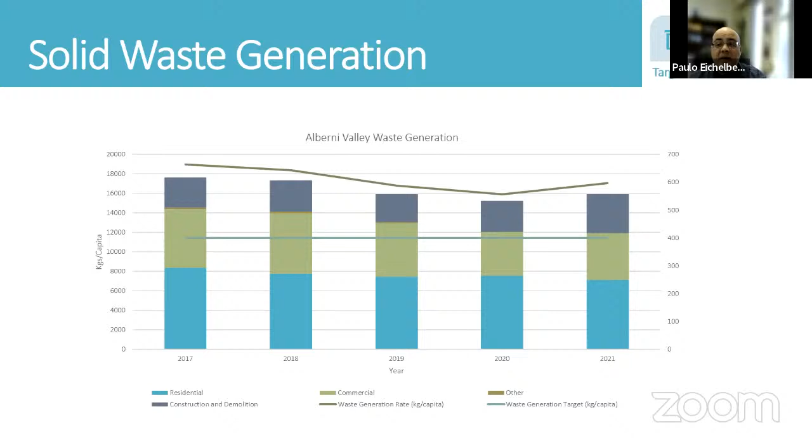The next piece, waste diversion. So this is one of the biggest things. Actually, it's the biggest thing that we had last year, and that was the rollout of 3-stream.

The tonnage, and we can also see the tonnage with the onset of the new cart system, showed that we actually upticked our recycling diversion a little bit better, whether more convenience or more material coming in, et cetera. Needless to say, overall diversion of nearly, actually a little over 60% of the waste stream from garbage landfilling into a diverted material piece there.

So garbage is down to about 41% just for the single family home piece within city of Port Alberni. And that's a huge shout out to the entire team involved on the contractors on the city side. Is a major success point.

And that's a major change that we did, 6,700 homes. And to date, so far, it looks like from 2021, this represents 1,640 tons of material, all broken out. So major, major success.

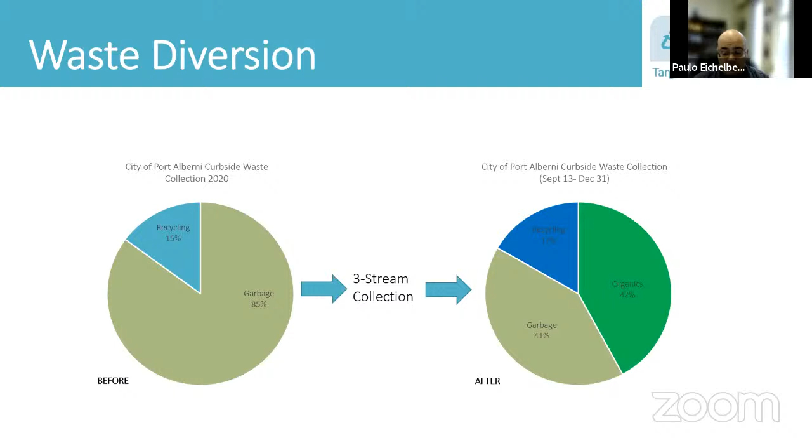The next piece on waste diversion, organics, again, is the largest contributor. So looking at the graph, you can see we're on an upward trend, especially if you look at the yard waste compost material. Yard waste compost material, the green that you see in the graph there, reached its highest amount, again, hugely in part to the organics diversion up and the upgrades that we did last year.

It also includes the yard waste compost that is already coming in and being diverted, separated at the landfill. And it also includes the private diversion. In other words, materials that go straight to the compost contractor in the valley, earth, land, and sea. When you put all that together, it's 2,200 tons of materials, all told, that was diverted. For a total diversion that you see on the graph here of upwards of 5,000 tons of materials.

And other materials that we see, it reflects everything that we've taken from 3rd Ave, from McCoy Lake, as well as Bamfield. Bamfield saw a little bit of an uptick from 40 tons to about 49 tons. As you can see here as well from the graph, still a good upward trend.

Some of the materials do remain static, but the stewardship programs are slowly increasing as well. Again, a lot of it can be attributed to more work, more cleanup work, especially due to the pandemic, people being at home, even though things are opening up again. There's also that outreach piece. People are seeing more opportunity to divert these materials.

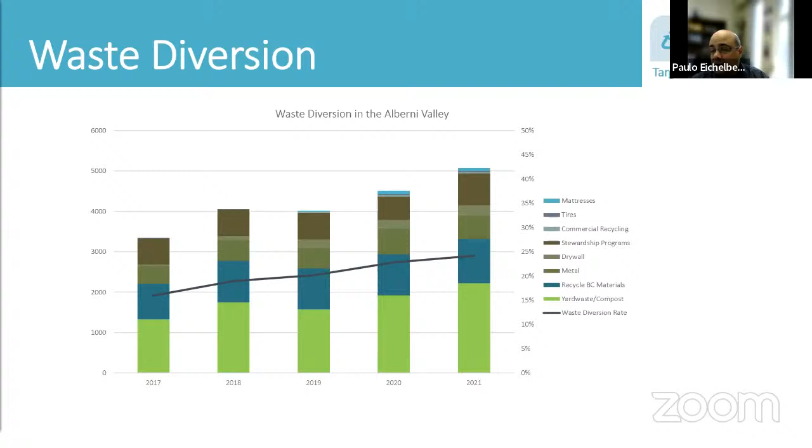So now we jump into landfill capacity. From the graph that you see here, I'm just going to shift so I can see all of this. Biggest takeaway that we see here is we've got, based on the annual report and the calculations we have, there's an estimated closure minimum of 2091 to 2093 when the landfill would in theory close.

That then does not factor in the piece regarding organics. If we get up to between 50% conservatively of all organics coming from the Alberni Valley landfill, regardless of source, there's a potential to extend that out to 2121.

Now, we'll talk about it a little bit when we get into the DOCP, but want to make a note here. The DOCP and the annual report have a very different perspective. DOCP is a forward planning document we'll talk about later. The annual report shows us our actual calculations, taking all the variables we've had in place, and looks back over the last 5 years as a measure of how we've been doing.

So these are variables that are changing on a regular basis, and we see more refinement, especially as we look at things like how our population changed, how we do with a full year of organics diversion, increases in self-haul, those kinds of things. And that'll give us a better baseline. So 2022, we'll see some changes again on how this extension to landfill capacity works.

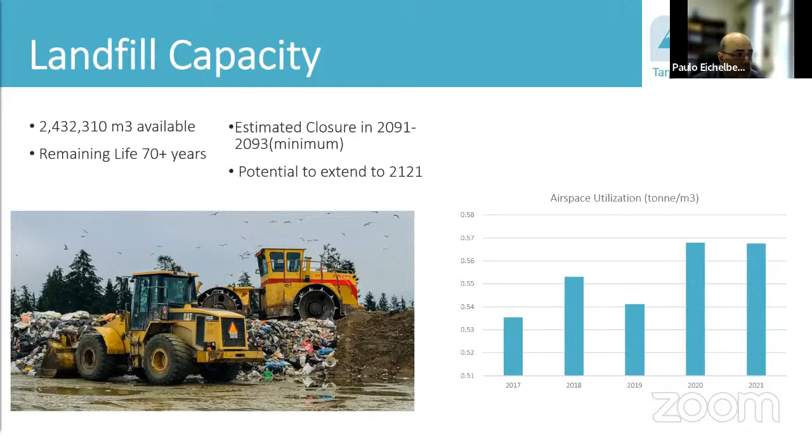Getting into finances. The graph shows the reserve funds. Total AV system costs over the previous year are up about 7%. Net system costs, which include everything, landfill, waste diversion, administration, Bamfield, Third Ave Depot, all of that, are overall up about 8.7%.

The biggest thing contributing to that, you could take a look at the reserve funds calculation as a takeaway, has been up. It's reflected in the financial plan, and that has a lot to do with the grant spending involved with the AVL upgrades completed last year to accommodate more waste segregation, as well as the curbside material we've been collecting under 3 stream.

As it stands, as of 2021, we had $2,470,524 in closure and post-closure reserve costs.

Shifting again, you can see things still look quite static for our capital fund and our post-closure fund. It's still going in a good direction, but more still needs to be done as a takeaway.

Another takeaway here, and we'll see it more in the 2022 report, is the DOCP, now that it's finalized, has updated present day costs of what needs to be put away for funding. So we're going to see a change in 2022. We've seen it in the financial plan, and we'll see it again in the 2022 annual report next year, reflecting more 2021 dollars on what needs to be put away for the eventual closure and post-closure monitoring of the landfill. That's the big takeaway from this slide.

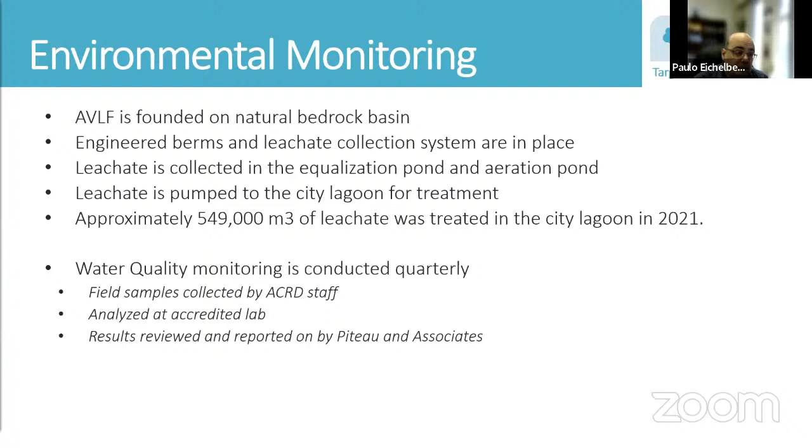Data is reviewed by an accredited lab, and Piteau and Associates have provided a 2021 report, as you've seen attached. Moving forward again, this is how everything operates. So the graphic you see here is an overview of the landfill. You may have seen this before.

And so the blue arrows indicate how everything—oh, I'm sorry, there's a question from Director Cote.

On your last slide, you pointed out that monitoring was done quarterly, and I'm wondering why it's not done monthly.

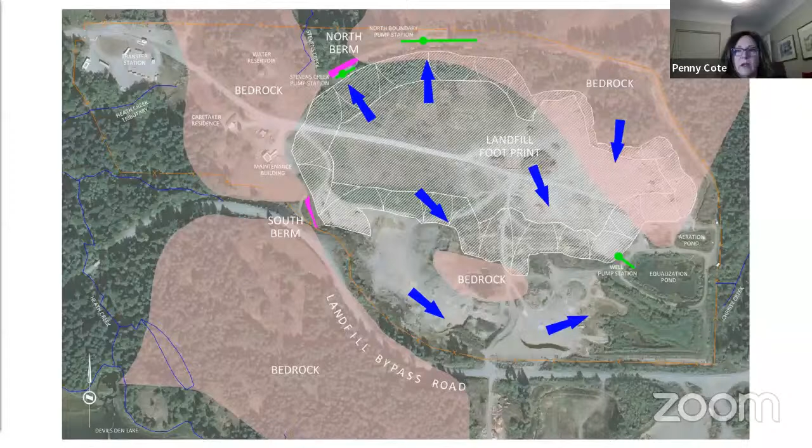That's a great question, Director Cote. Under the Ministry of Environment criteria, or rather their regulation, the requirement for any active landfill is quarterly sampling. Unless there are specific orders regarding a landfill, they can always ask for monthly, but under the regulation it is quarterly. There's also an annual summation, with some samples taken on an annual basis, all combined into the water monitoring report. That's why it's not monthly, and it's fairly standard with any of the landfills throughout the province.

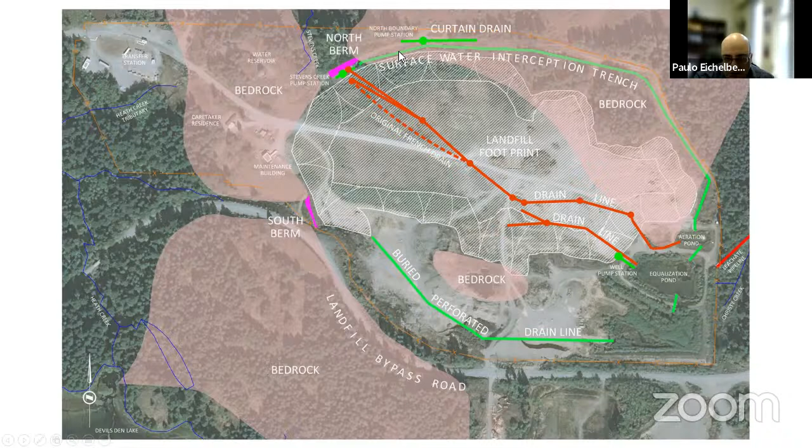This shows basically where all the water is intercepted. The next one shows you how the flow will actually work. Under the green, any of the interception trenches boosted by these lift stations direct all the water down to the aeration pond or over to the equalization pond. Same thing happens down on this end, where we have a buried perforated drain line that pitches through here. The red line indicates the original French drain that was installed in the landfill many years ago, which is also a preferential channel for leachate. Ultimately, everything winds up in this southeast corner and heads down to the city treatment lagoon through this leachate pipeline.

So we sample at various points throughout, along the border, and also from the leachate lagoon itself. We transmit any of that data forward to the City of Port Alberni and their team there as well. So that's kind of how the system works in a nutshell.

And whoop, I see another question. Thank you. So the aeration pond and the equalization pond, are they adequate for the amount of rainfall that we've had and are expecting in the future with climate change? I'm just wondering if they're big enough or if they would overflow.

Thank you, Director. At this point, yes, we have sufficient volume in place because it's all predicated on in-out. We're able to take on huge surge events like we saw last year and send this material down straight through the leachate pipeline for final treatment. The quality of the water itself is such that we're able to do that on a continuous basis. So we have an adequately sized set of ponds that allow for pre-treatment with aeration, enough volume that we can settle that. There's always an opportunity that we may need to increase it at some point due to climate change, but at this point we're sized for—I'd have to look back in the notes—but I believe it's a 100 or 200 year event. I'll have to dig through that.

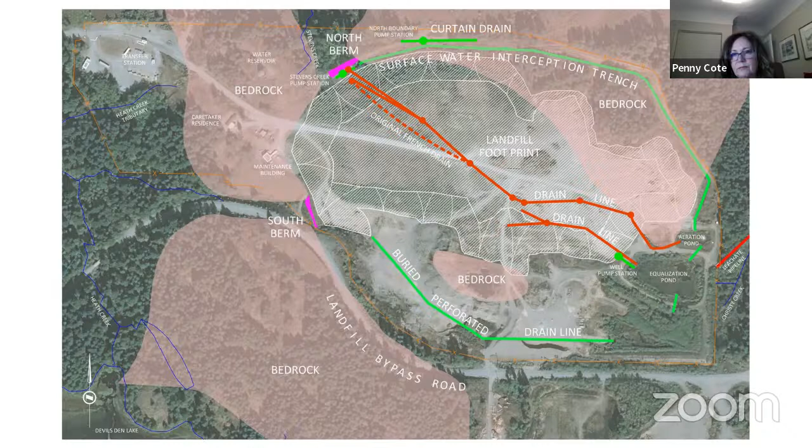Thank you. I do have concerns about the amount of rainfall that we do have and these events that we have, so I just want to make sure that we adequately have provision for collection of that amount of rainfall.

Absolutely. The other piece to tie into that is the maintenance operation piece—we'll get into the projects later on how that's all involved—but ensuring that we're able to keep things in an operating system and keep the material moving forward. With the ponds last year, we were quite low, thanks, air quotes, to the heat dome. When we got into the surge events, our freeboard, the gap between the surface of the water and the surface of the berm, never went below a meter, which is fairly standard. So we had good space to manage the water volumes. But you're right, it's definitely something to keep an eye on.

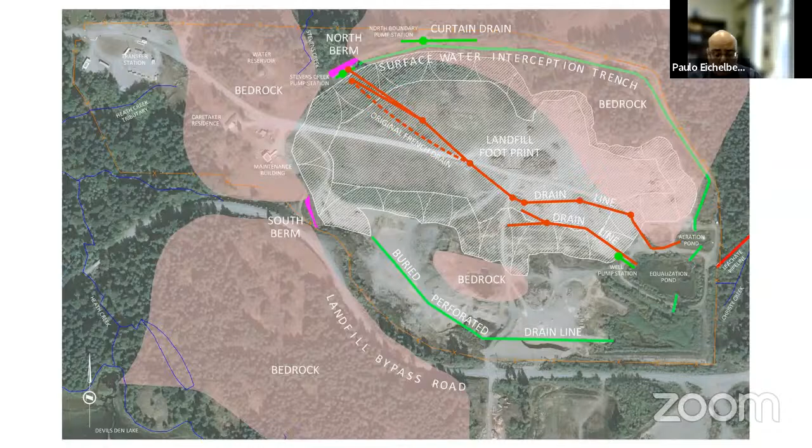All right, our next piece, getting more into environmental monitoring, and I'll touch on it a couple of times here.

We talked about issues back in 2019 with intermittent operations of the leachate interception wells. Graduating into 2020, those wells were rehabbed and pumps were replaced, addressing any issues with leachate threatening to leave the site. The idea is to keep the plume, keep the leachate material in, and funnel it through the treatment system.

The 2021 change was that we took the system that was there and upgraded the SCADA system even further, and added additional pumps so that we continue to have redundancy at all times. You run one pump while another stays down; if you need to do maintenance, you can switch them back and forth on a regular basis. I've got some graphics for that when we get into projects.

The results overall, it is a long process, but if we look from 2019, we saw a lot of the readings fall off because the wells needed to be rehabbed. Things recovered quite well once we got back up in 2020, and now in 2021 on a regular maintenance schedule with the added and replacement pumps, we see good trends maintaining everything as far as the leachate system is concerned, so we don't run into risk of excursions, showing positive trends.

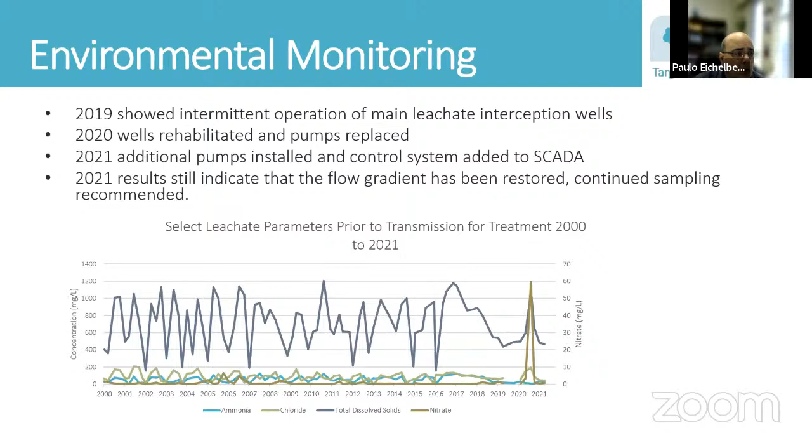Landfill gas: we worked with Sperling Hansen as part of the upgrade for the DOCP, which we'll talk about later. Part of that involved updating the landfill gas assessment to include organics diversion. That was started in 2020, but not completed until they had good estimates on tonnages they could expect.

So they factored that assessment to include organics. The big reason, and it may sound repetitive, is that when you deal with organics in the landfill you have an anaerobic environment. Because of that, bacteria gets created that generates methane. The idea is to get that material out of there. There's still material in the landfill that'll continue to generate methane and fall off over time, but the idea behind organics diversion is to pull the fresh material out and prevent it from even going into the landfill, creating an additional load of methane.

It's a huge environmental benefit not to create this methane issue. If it goes to a compost process instead, which is aerobic, no methane is generated in an aerobic process. So there's a good win-win on both sides.

Looking at how we slowly turn down the valve on organics in place, the estimate is we're at about less than 900 tons of methane generated in 2021. We actually dropped slightly from 897 to 891. We'll see if that trend continues. Ideally, the more organics we divert, the more continuous the drop, but there will still be some methane generated.

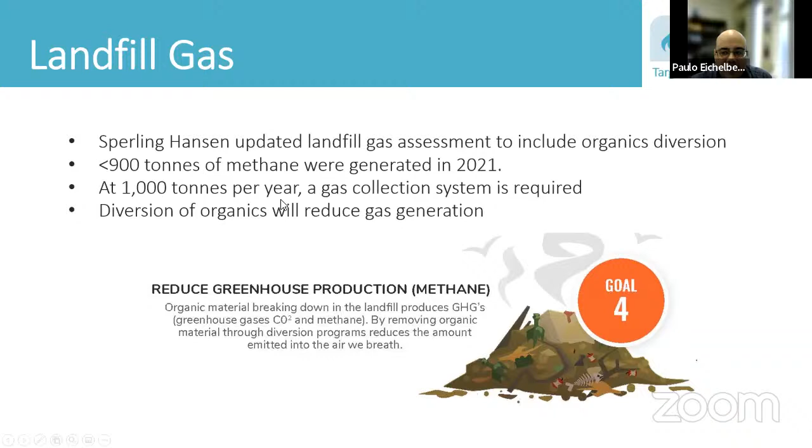Okay, let me jump ahead. I just jumped into projects, so let's do that.

Getting into the first one, we talked about it, and we just love talking about it because it's amazing. The 3-stream and organics diversion was just ridiculously successful last year. In a 16-week window, we saw 667 tons of organics. We even saw a slight increase in recycling, went up to about 232 tons from approximately 200. And it dialed down to about 659 tons of garbage that came out of there, where prior to that it would have been well over 1,000. Massive, massive diversion just from that brief snapshot in time. And it sets the stage again for what organics looks like going forward.

It was a massive team effort behind all of this, on the city side, on the staff side, contractors—not enough words. It was an incredibly successful program, and hopefully we see more of that.

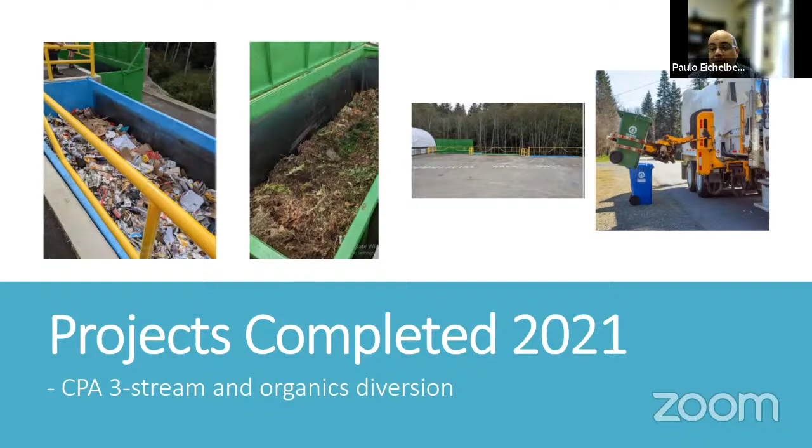Next project. I'm going through some of the key highlights here, but stop me if you have any specific questions.

We talked through monitoring program improvements. At this point we're training with the consultant and onboarding our water operations staff. They took it and ran with it, doing a fantastic job of sampling. Now they're able to continue sampling, send everything forward, and the accredited lab takes it from there with analysis going through PTO. The interaction seems to be working really well, and we'll develop procedures on a regular basis so it's just plug and play. Great job was done by the team on this work.

The other piece - I thought I'd add this pictorial in here. This is a screen you see, a satellite view of the actual SCADA, or the actual landfill site. This is what you'd see if you remote into our SCADA system - that's what the operators see.

Super brief - the blue icons you see show our pump stations. They'll show our water reservoir, that's the McCoy Lake Tower, and lift stations around the transfer station area. It'll show us levels and operating times for pumps.

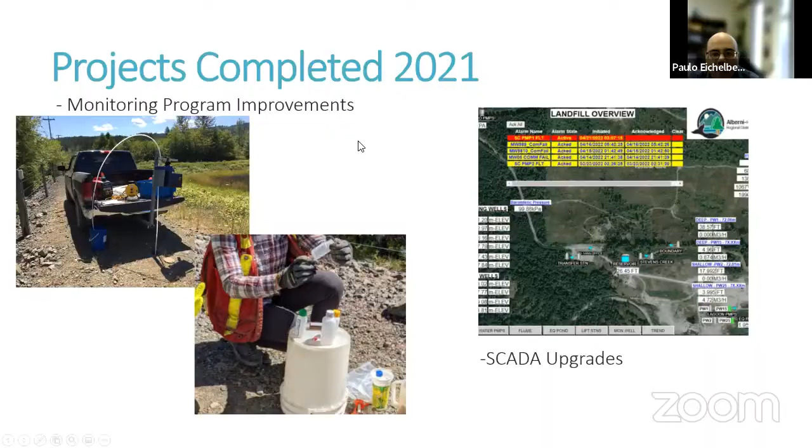Talked a little bit about the upgrades we did - it was organics, but not just organics. We did massive upgrades to the transfer station itself: new access roads, tipping bin walls, a lot of earthworks and infrastructure put in place. We've got the area where we offload curbside trucks, tipping walls laid in place for any depot material, slowly moving that down, and opened up parking areas for working day or night, adding directional signage, you name it.

It seemed to work out really well - a lot of people gave a lot of thumbs up as they worked through the system. It was definitely a big change because it looks like a brand spanking new transfer station. So that's where we landed on that.

Other projects completed: asset management plan is an ongoing piece. In 2021 the consultant completed their site inventory - not just here but the West Coast as well - and went through all our sites establishing life cycle pieces to work forward with on all site infrastructure: Alberni Valley Landfill, Bamfield Transfer Station, our Third Ave Depot, things like that.

We also rolled out, or expanded on, the Sort and Go app, the waste app. Some brief takeaways: we garnered 4,300 users in 2021. Three Stream had a lot to do with that, with a lot of the alerts that went out. Out of the 4,300 users, roughly 3,500 came on board at the beginning of September, downloading and utilizing the app however they did it, to get all their schedules, how do I dispose of this, all of those sorts of things.

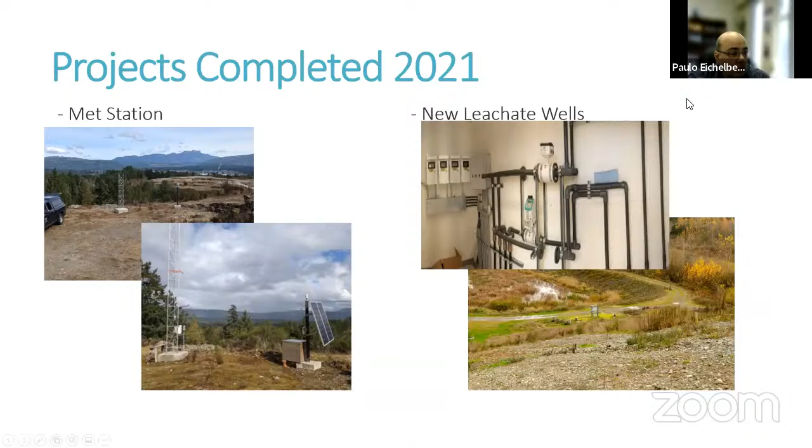Landfill gas flare installation, we talked about that briefly. That is going in this summer. We hope to wrap that up, hopefully by mid-July or so.

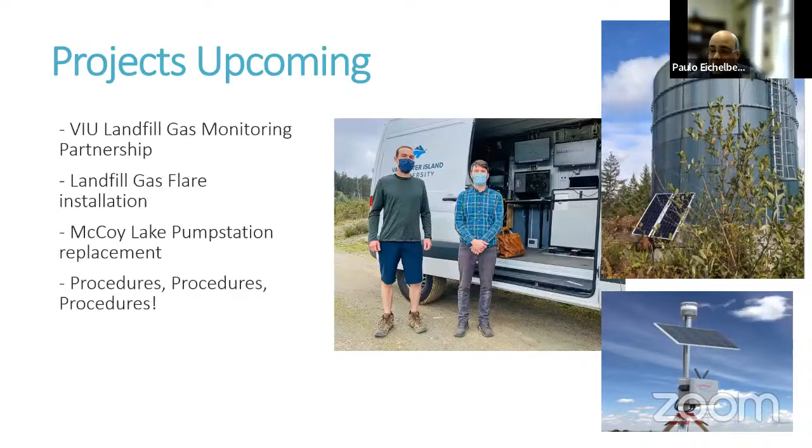And then finally, it's procedures. We've done a lot of these, whether big or small upgrades at the landfill. So a lot of it is procedures. Now we've got all these pieces in place, we're going to be refining those procedures with the group from VIU, with our water staff, with all of our contractors, so that there's a go-forward every single time - anybody coming in can always pick it up and run any portion of our system.

Other projects: we have the Alberni Valley Recycling Collections contract. That's the RFP award for Beaver Creek, Hupacasath, and Tseshaht First Nations for curbside recycling, and that'll be coming out shortly for contract award. We'll bring that back for board consideration.

Solid waste bylaw is a longer range piece of work. We'll be doing some of this over a couple of years, but ultimately we're trying to see a more complete picture of what waste is like. We know what comes through our doors, we know how the stewardship agencies work. What we don't see is what a lot of companies are diverting on their own - if they're doing various works, the easiest example is recycling metals, that immediately goes into a metal recycling stream that we don't necessarily see, but the work is being done in the Alberni Valley. So it's putting mechanisms in place so we can get the data to get a more complete picture of exactly how much material is diverted from the Alberni Valley landfill, whether inside our system or outside of it.

We're looking at investigating baling of recyclables - that's consolidation of any recyclables that come through the Alberni Valley system. It's an investigation piece in place right now, looking at cost, looking if it makes sense to realize some efficiencies, and seeing if we're able to consolidate recyclables before they leave to a larger material recovery facility for post-processing.

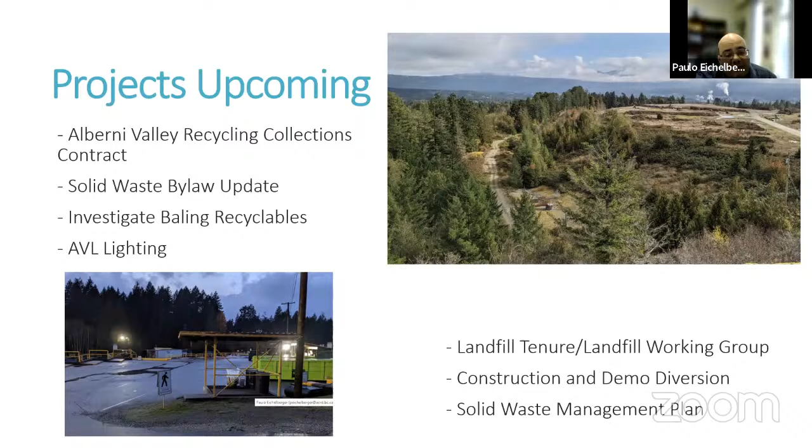At the end of all this, just a quick shout out to everybody involved - it took a village. Both staff, contractors, and the public for being patient with us through all the changes that we did. We've seen the before and after picture of the landfill.

That's about it, so I'll open it up for any more questions and I will stop sharing.

Go ahead, Director Corbeil.

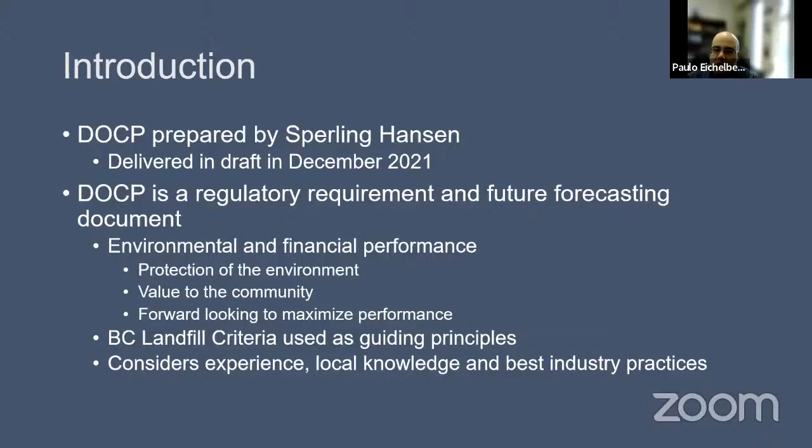Brief overview, we know where we are. The site is north and west of Port Alberni. It is a strategic asset just based on location. The next closest sites are West Coast Landfill, Comox's, and Nanaimo's landfill. So this is kind of a key hub for anybody passing through this area, within this area, for where you deal with solid waste.

Briefly, we're still working through landfill ownership tenure. We've got fairly good road access, and it's an old site, going back to the 70s. It's got power and water, and a good internal network to get around the site, whether you're diverting waste, doing monitoring work, doing maintenance, you name it.

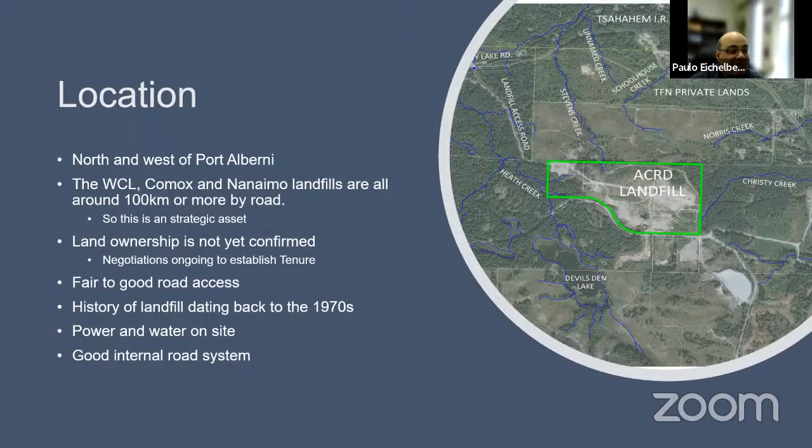The structure is, again, a super technical document. It's fairly heavily involved, and again, it's a highlight. So the structure is based on how the province would like to lay out everything in place. And the theory is, this takes you right from the history of the landfill itself, right through to how it's being designed, how you sculpt the hill.

Geotech, lifespan, what it's forecasting, what it's going to be looking like in theory in 5, 10, 20, 100, 200 years, how you fill, how you manage materials, how you operate, environmental systems, fire safety, cost analysis, and ideally it's a planning document. Because it forecasts in a very long direction, ideally it's updated every 5 years. The reason for that is to update those current day costs to understand exactly where we're at and what we may need to store away for reserves.

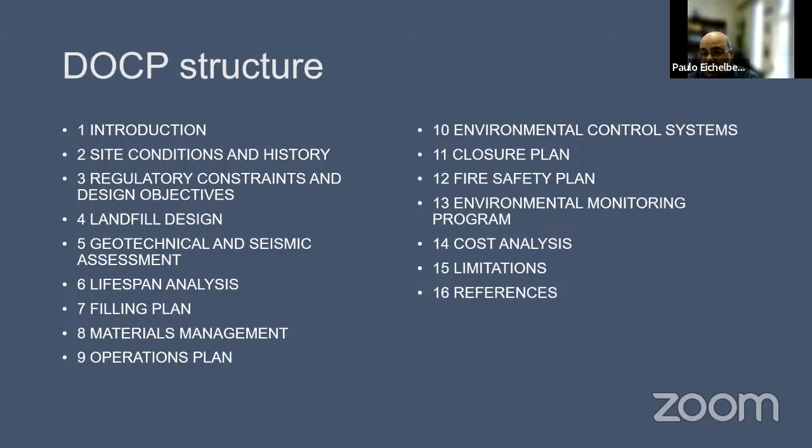Really big piece to this document. So I'm going to touch on, as we go through, some of the sections, some of the key sections, and some of the takeaways. I'll try not to blow through it too much. It's, again, a lot. As we talked about earlier, regulatory constraints and design objectives are in place here.

I put in some of the key highlights that we look at, but Sperling Hansen did a preliminary conformance comparison. Here's what the criteria looks like, and here's what the landfill looks like. Looking at setbacks, where they're at. Are they in place at 50 meters from the boundary to the land parcel?

What's the contaminating lifespan? Contaminating lifespan, you'll hear me refer to a fair bit. The idea is, when a landfill closes, how long, in theory, is material breaking down until it's no longer of a concern. So your contaminating lifespan of a landfill is fitted in under the criteria in different sizes.

It literally goes through a 30-year closure and a 100-year post-closure, or it gets up to a 200-year post-closure. Right now, by default, that's where our landfill sits. So you're looking at the year 2400, 2500 kind of thing, when in theory you would never have to monitor the landfill again if nothing changed, no tech changes. We know that's not real, but that's how the planning looks as far as the regulatory piece is concerned.

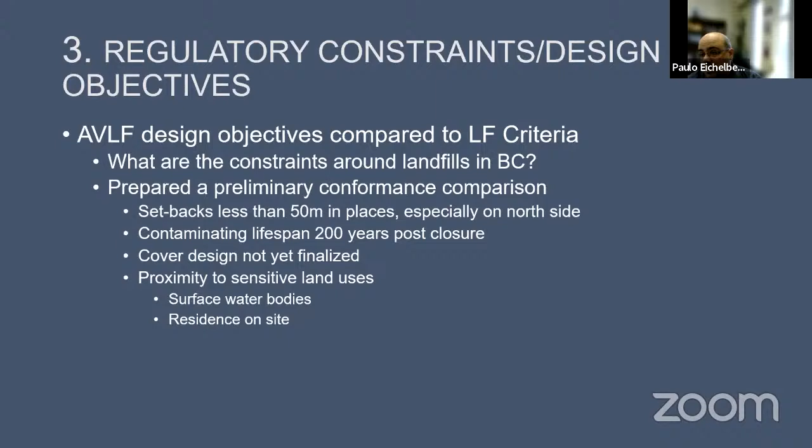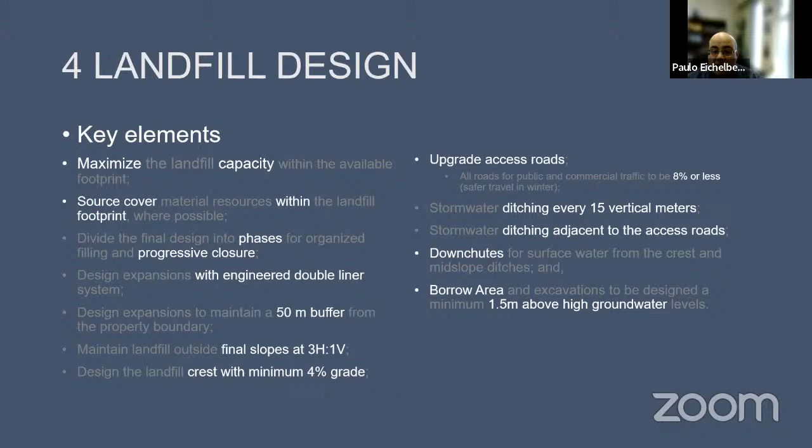So landfill design, these are some of the key takeaways here, but I'll actually shift to the next slide just for some highlights. You're looking at maximizing capacity, where your cover is coming from, how you phase in your closure of the landfill, the types of systems that you use on a go-forward basis, how you maintain your buffer - in other words, where your toe of waste is as you build a hill upwards, how your slopes look, what the total crest is going to be like, the top of the hill that you're sculpting to ensure that you have proper drainage.

How you're accessing the material. As you make the hill bigger, you need to be able to access various points on that, whether you're landfilling or you're monitoring after the fact and checking cover systems, how you build downchutes, how you deal with surface water, and where your borrow areas are going to be for cover material and for construction of your landfill cells. And now we'll go through a satellite map here.

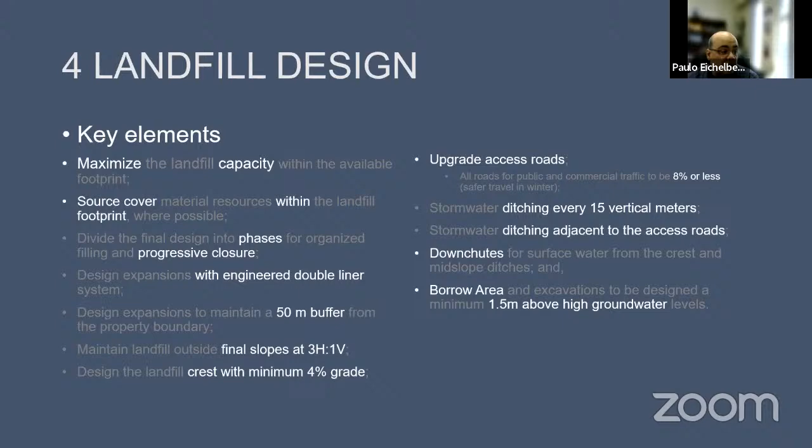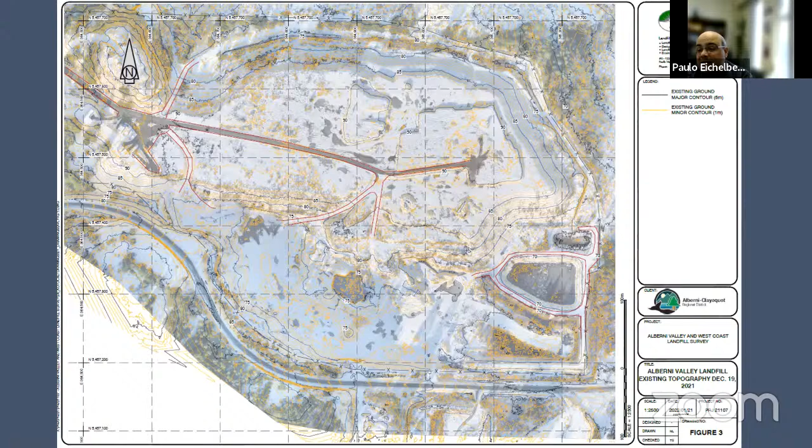Now that's what it looks like now. This is what it's going to look like in the future at full build out. Again we've taken the hill and put it on its front. It shows the buffer zones to the end of the parcel, the contours every 5 meters showing how big the hill will get, and the conceptual design of where the access roads are going to be.

You break it up about every 15 to 20 meters so you're able to access certain areas of the landfill—whether you're closing off the landfill or getting larger commercial traffic through to drop off waste safely, move off site, and then let the operators come in to build the actual finished hill.

Now we're going to get into a section with the graphics that talks about phasing. The original landfill approach years ago was you had a large area and eventually covered everything up. Because that's not really realistic given the size of various landfills, it makes more sense—and it's been captured in the landfill criteria for the last 6 years—to go for a phased approach. You build up and do sections of the hill, trying to build lobes in these different sections.

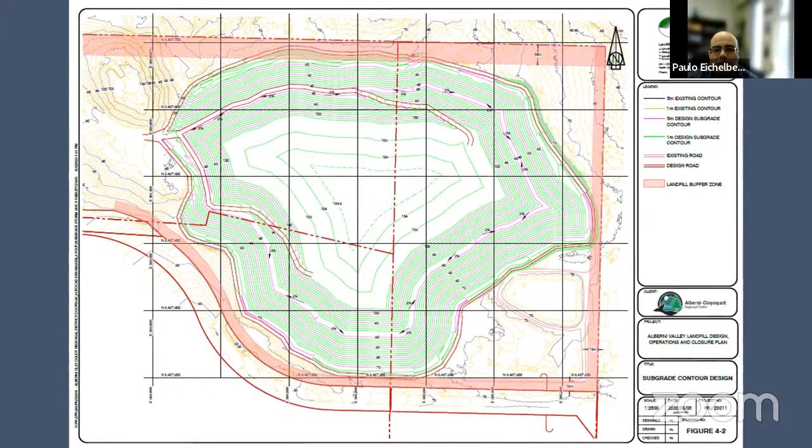Phase 1 was designed in the DOCP working with Sperling under 2 scenarios as we build the hill. Scenario 1: nothing changes—we have organics in play, factoring in a population increase of 0.9% year over year as a forecasted estimate, different from the annual report which was a snapshot looking backward. This is go forward.

Scenario 1 is status quo. Scenario 2 is fuller organics diversion. We try to keep it conservative, assuming 50% of organics are diverted no matter what they are or where they come from—commercial, residential, kitchen scraps, yard and garden waste, wood waste, all those sorts of things. It also factors in what happens when you fill your waste cell and compact it, or compact it further to create more space. These are the two scenarios we'll talk through going forward.

So again, our aerial view—this is what the first phase, that northeast section, looks like. I'll breeze through some of this, but you can see our contours: the difference between current level, the brownish area, and where the phase tops out, we've got another probably 15 meters of lift to go. If nothing were to change, it's approximately 26 years, but it will actually be more based on increased compaction, increased diversion, and a ban on organics.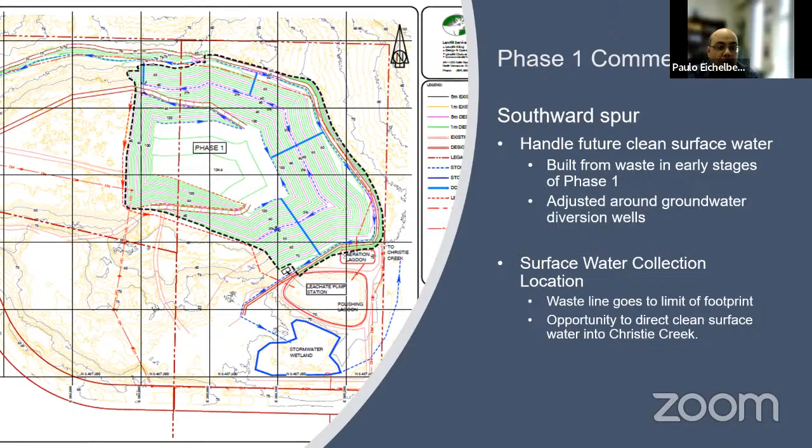So we built around that, and that's what the design takes into account. Now we'll go forward - this is just a quick image of the southern area, looking down towards where, in theory, the stormwater area would be.

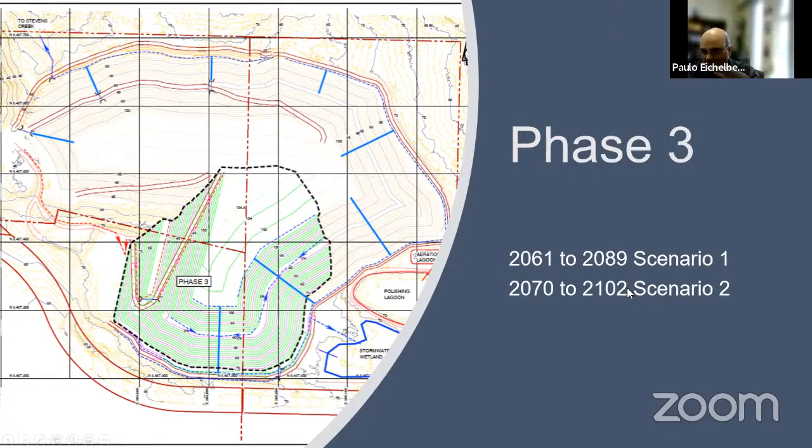This is what phase 2 looks like under scenario 1 or scenario 2, either to 2061 or to 2070, before we do a full closure. By this time, phase 1 is completed. Phase 3 takes us out to 2089 or 2102, again with better compaction and more waste diversion. And then the last one gets us out to 2114, which would be the full build-out of the landfill.

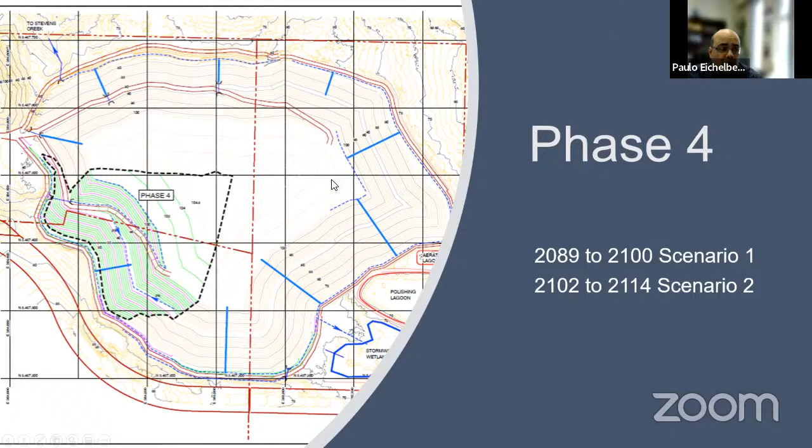By this time, the full closure system and downchutes are all in place, and you go to the point where you're dealing with just your leachate system, your stormwater wetland, and monitoring and contouring maintenance on the actual cover system as well. We'll get a little bit more into detail on the lifespan analysis.

Some of the key takeaways here - again, this is the scenarios that I talked about. I'm just going to shift the screen a little bit here.

These are the basic rates that were calculated for modeling. The disposal rate was 0.564 - this was at the time for the 2020 year. We stuck with that to keep it like for like, but asked Sperling Hansen to ensure they factored in organics diversion. We agreed upon setting it at 50% to be conservative. The idea is we're aiming for higher than that, and higher than that means you would extend out the landfill. But being conservative, these are the two scenarios.

You're using either your current waste-to-cover ratio - in other words, how much waste is being put into place versus how much dirt cover is being put over that waste. You have to get down to a certain minimum under the criteria, usually about 20 centimeters or so, compacted in place, and then the rest of it is compacted waste.

So this, in theory, is where we are. Industry best standard is usually around 4:1, in other words very compacted waste. Right now, a model density is about 0.81, or 810 kilograms per cubic meter. Ideally we want to get it up to 0.9 for the material that is physically going in.

They also factor in settlement, because as we know, over time, as you're sculpting the hill, it is going to slowly settle out - that's just the nature of the beast when waste breaks down inside the landfill. You wind up getting back some airspace from that, but that's something we kind of keep as just a control factor in place, and it's what Sperling Hansen utilized for this model.

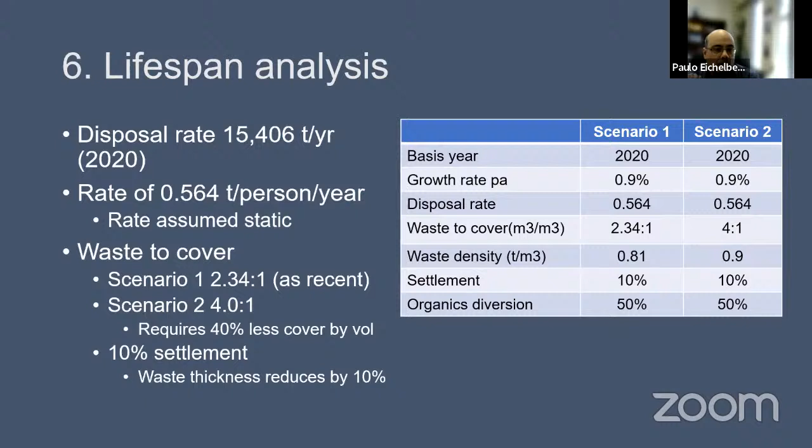This is just a summary of the years under scenario 1, scenario 2, either 80 or 94 years. Again, conservatively, we saw in the initial calculations in the annual report that, in theory, we could get up to 2121. Absolutely realistic with the way organics is going, but we need more baseline data to see where we land.

Again, this is a planning document, and the whole idea is you don't count your chickens before they hatch. So use that as a guideline and see how good it actually is going, with the annual monitoring of the landfill itself.

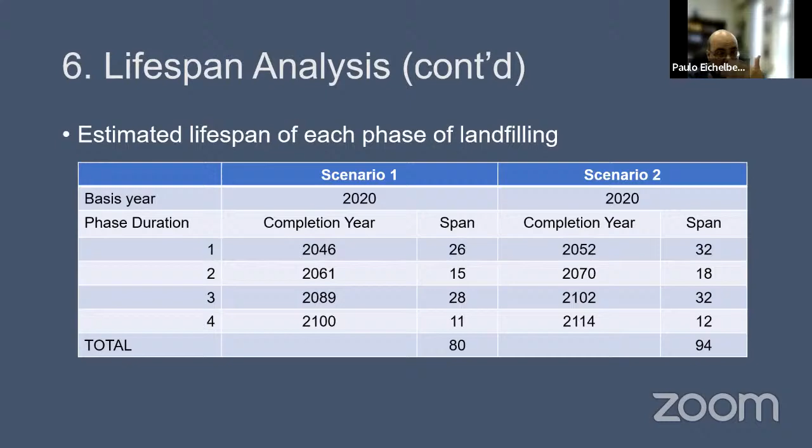So we talked about phased filling. This is literally phased filling of the actual phase 1, that initial lobe I talked about. We saw an opportunity on the side there, near the aeration pond, the equalization pond, and the pump station.

There's opportunity here to build up this slope and build this plateau out on the existing toe of waste. We're starting that this year. The period over the next 20 to 30 years where we build out phase 1 involves building your foundation like you would build a house. Get up to plateau, then talk about putting on your roof. Moving forward, we'd be looking at closure on this outward cap, then work our way up the hill, as you can see the flow.

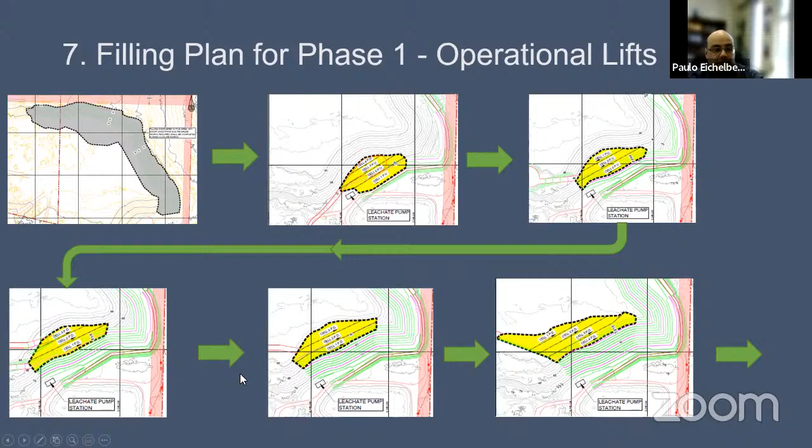This is all done in 3-meter high lifts, and then you get up to the final plateau. This portion of the hill is complete, and we're doing what's called strip filling, back and forth across the landfill, to make that big plateau as you build a hill outward. For comparison, we're at about the 90-meter mark. The final elevation on the hill is eventually going to be 105 meters.

It takes a long time. We're talking hundreds of cells to get to that point, which is why we're seeing this visually, but at the same time, it's 30 years or so to actually get to that elevation before we go to the left and start building out phase 2.

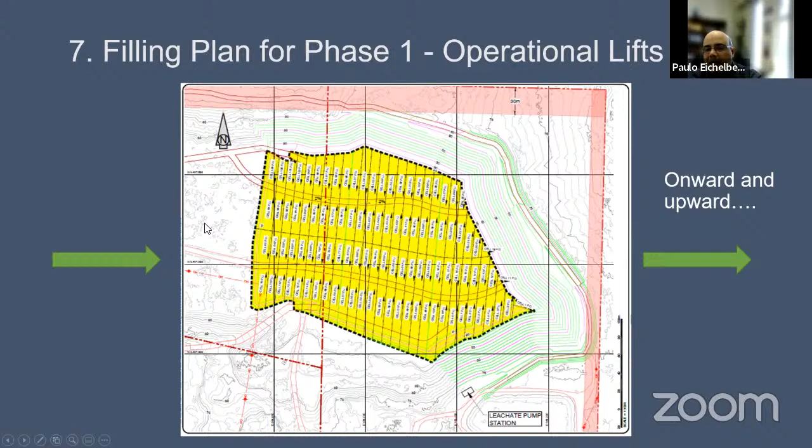Now we'll get into materials management. This is all the materials that go into building this site. The document covers what you're using for cover soils, how you're applying it, what you're using for drainage, road crush material, topsoil. Eventually you'll have a final cover system used for topsoil, and protection layers in place, like riprap, which is larger material.

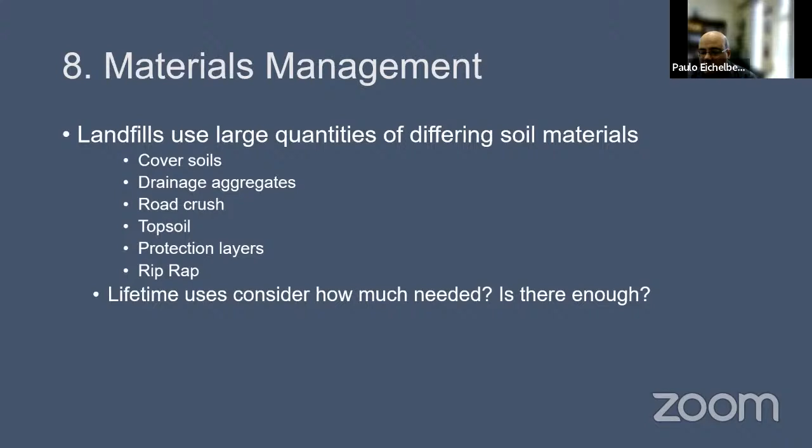So lifespan planning considers: do you have enough material? Do you have enough cover material on site, or do you have to get it off site? In the next chart, under the scenarios, I'll highlight where we need intermediate daily cover, borrow areas, and material haul to site.

We know we've got roughly 60,000 cubic meters of cover material. By the end of life, we will have needed 500,000 cubes at minimum with full build out. So that's looking at whether you're blasting out material on site—there's very limited material you can use—or whether we look at off-site use.

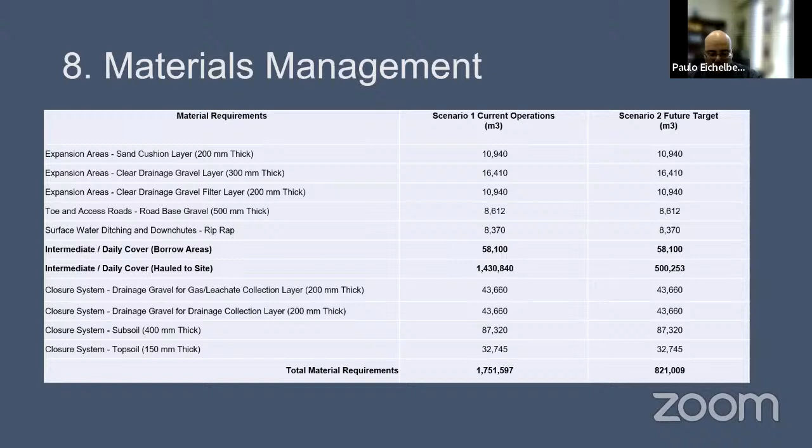We currently truck in material from soil piles at the Avra Airport, one of our assets, and utilize that material for cover operations and general operations of the landfill, in order to meter that material out. That said, there's continued work on best practices in this document on how to more compress your cell and get even more efficient than they are now with how you use cover, and some of the considerations we have in the manual.

Construction demolition waste—just a brief note on it. This is great material: mixed aggregate, crushed woody, drywall material that's not separated, those harder structural materials. They're great for building retaining berms, and then you can put impermeable material around them. We look at options for stockpiling that material for use, and opportunity for using contaminated soils—they could only be up to a certain level, so likely not, but there is opportunity to use material up to a certain level in internal operations as you build your landfill cells.

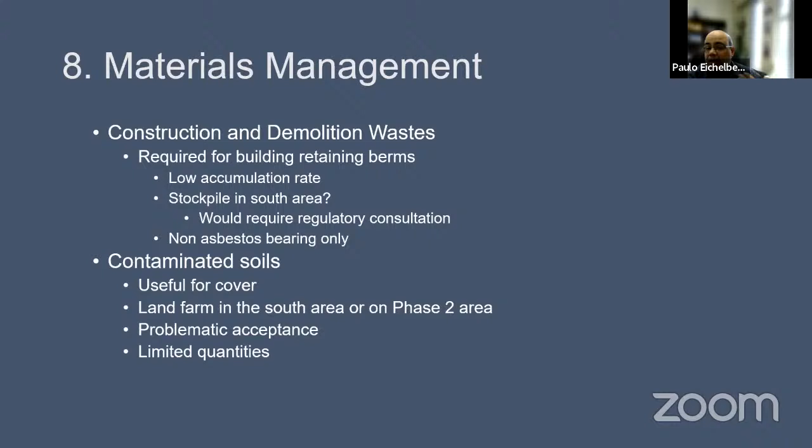Operations plan: the operations plan is literally how you're building the cell, as you can see the team here, how you spread and compact things. This is generally the takeaway of how they not only build the cell, but how they'll be sloping everything so they can move back and forth after waste has been dropped off onto the cell, and using operating costs, linking reserve funds accumulation to the volume placed.

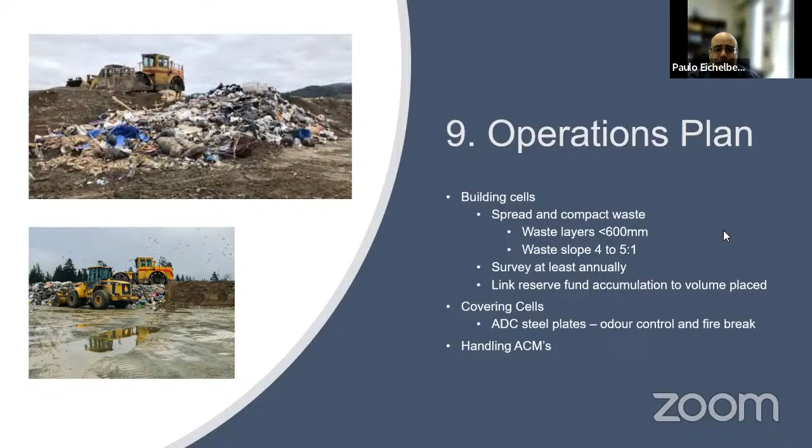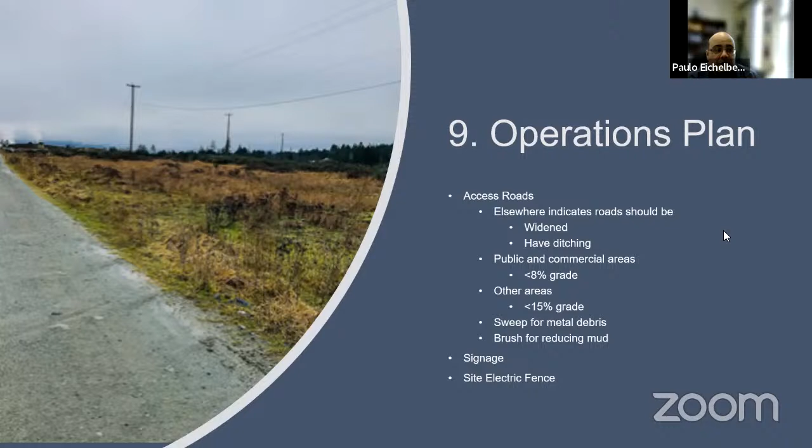Also looking at cover materials, cover cells, and how you handle asbestos containing materials, thinking back to Director Bodner's question earlier. Access roads are considered—signage, site electrical, fencing—need to keep everything in a secure operation. How you deal with litter control, whether using scatter fences to capture windblown material; the objective is none off site. So continue using the fences, walking and driving the site to look for material, and quick burial of waste. You look at dust control, odor and noise control, limiting attractants for wildlife. That's the idea behind the operations plan—it includes all of these different factors.

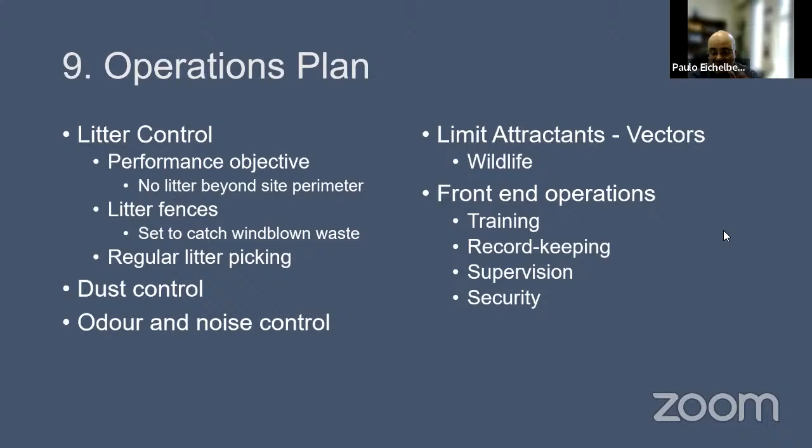Environmental control systems looks at leachate generation. We know what potential amounts there are based on the wet area that we are. Based on modeling, on average we can generate 230,000 cubes of leachate material, maximum 316,000 cubes. So the idea is to divert a lot of that water and try to keep clean water clean, which gets back into that phasing piece we talked about earlier.

Modeling was done to take all of this into account, and that is all captured within the document itself.

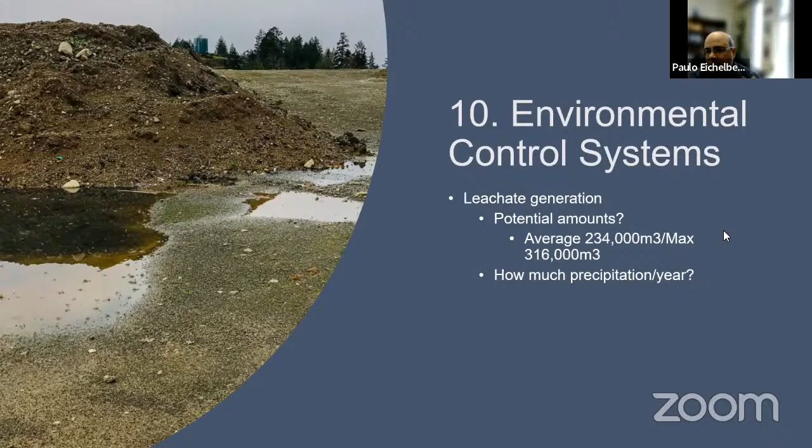Back on this, we've seen these overviews before. Just the leachate management strategy, using the system we have in place and thinking about the SCADA system as well - how we limit leachate, how the system operates, continue to monitor quality and quantity of the material sent to the city, and promote exchange of data between our team and the city's team.

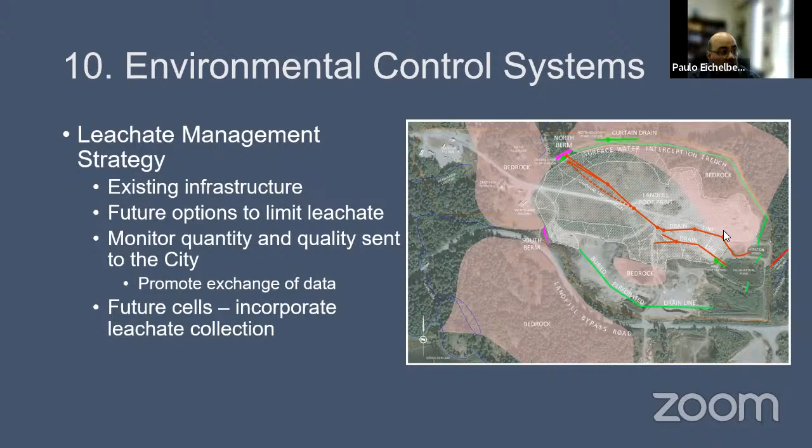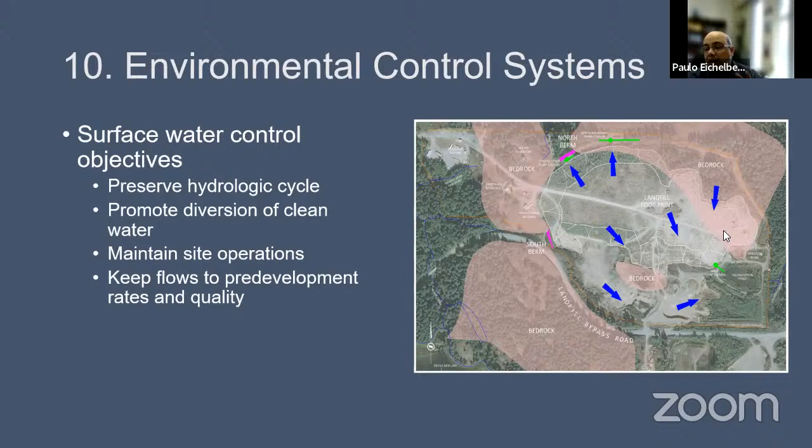Surface water control objectives: preserve the hydrological cycle, maintain site operations, and in an ideal world you're trying to keep flows to pre-development rates and quality. So you're trying to keep clean water clean, and limit the amount of water that is percolating through the waste mass itself.

Landfill gas, we talked about that earlier. Keep everything - design modeling is under 1,000 tons of methane generated. There is potential for voluntary capture of methane destruction. We'll have the landfill gas flare in place. Whether that actually has an opportunity to generate some greenhouse gas credits or not, we don't know - it'll depend on the volume that is actually generated. So maybe an opportunity, but it is reflected in the DOCP regardless.

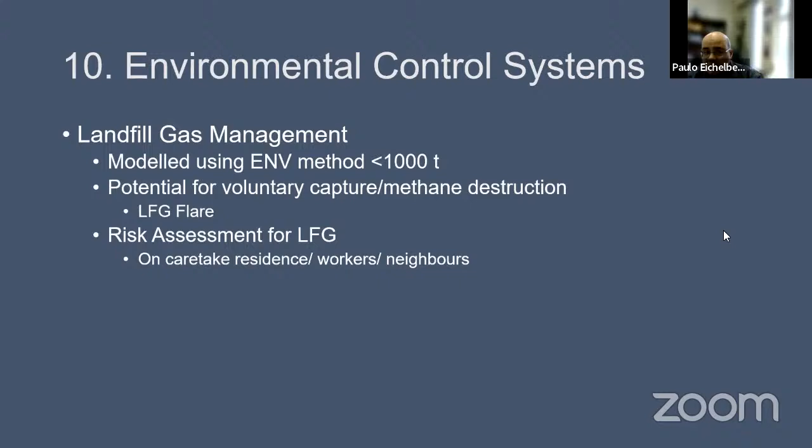And then risk assessment for landfill gas, whether it's on the caretaker, residents, workers, or neighbors - continuous monitoring is all about that piece. So best practices are captured in here.

Closure system - this is a side view graphic of the layer that we put on. Progressive closure in phases. Once you get up to a certain piece on the actual waste mass and it's done, then we'll be putting in the barrier layer. The idea behind this barrier layer is you're isolating the waste mass. You've got a good impermeable layer where water can't get through, and then a drainage layer with aggregate that allows any percolation of clean water coming through topsoil material and vegetation to come down and shed off the cover of the landfill.

This is how the water will not percolate the landfill. So you're dealing with just what went into the waste mass itself. That's what a phase closure layer looks like, and that's where the capital post-closure costs go into - that money winds up being set aside so you can go back later on. And then when you get to close the phase, this is the recommended design that we'd be going after.

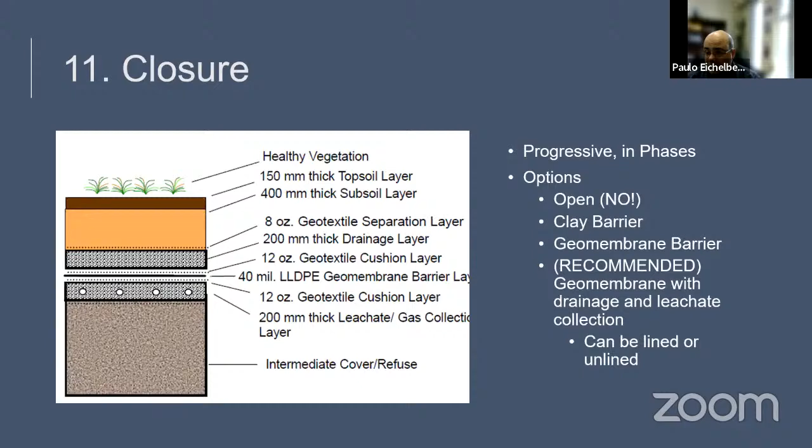Fire safety plan is fairly standard - compacting waste, cover immediately, all of those good practices, absolutely no smoking, that's an obvious one. But the other piece there, on the operational level not just the regulatory level, is for site-to-site operations. For example, contact info is updated to reflect that if something happens, if there was a call out for a fire that went beyond the capabilities of the site, it's a call out to, in this case, the Sproat Lake Fire Department, as it's within that protection district there.

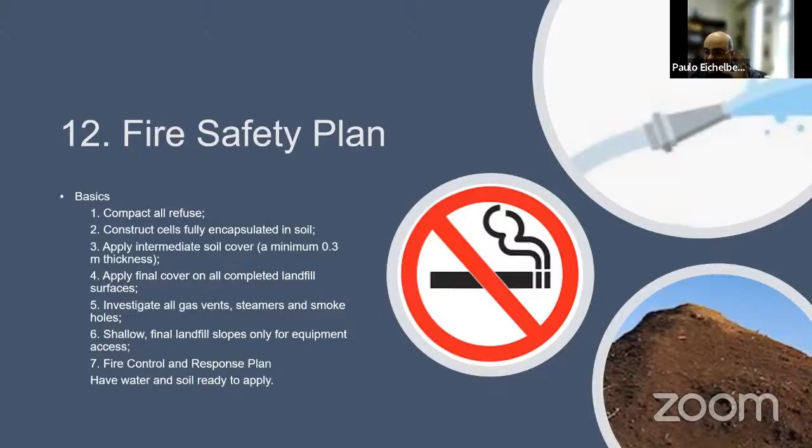Environmental monitoring program: groundwater and surface water, we talked about earlier - it's annually and quarterly, done in the field and done in the lab. Monitoring, as we showed on the earlier map in the annual report, is looking at on the north side Heath Creek, on the southwest Stevens Creek, and on the southeast Christie Creek. We look at quarterly sampling for various criteria: conductance, temperature, pH under the landfill criteria. Lab work looks a little bit further and looks at a whole slew of chemical compounds.

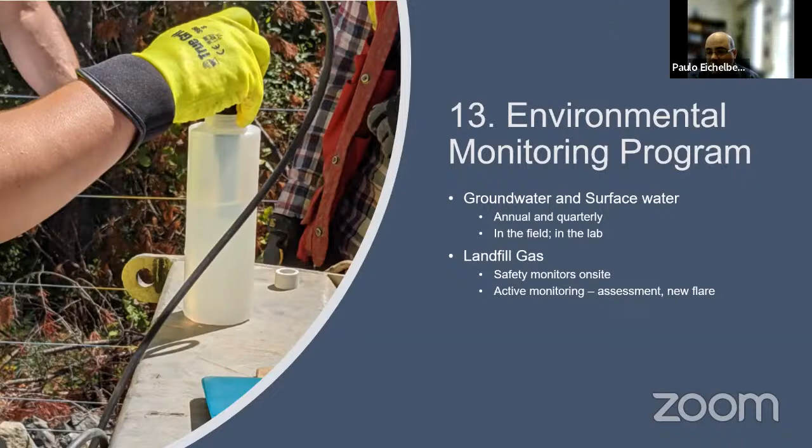Costs. So these are really high level. I'm just going to shift this over a bit so I can see what I'm doing. So high level cost analysis.

Again, these are estimates using 2021 dollars based on a lifespan ballpark of year 2100. So the idea is, should it close then? Until we do a contaminating lifespan assessment, the assumption is that monitoring and maintenance of the cover system of the site has to go for an additional 200 years.

So what that means is they've established that modeling piece, taking into account a series of these factors in 2021 dollars, looking at an estimated operating cost of $80.73 per ton.

Capital costs that you're seeing here, such as the access road, filling plan, capital work, a lot of this has been completed now. Some of it is still ongoing, such as the water pump house upgrade. So capital costs do not actually include the transfer station upgrades that we did with AVL. This is still back to the 2020 info that we had before.

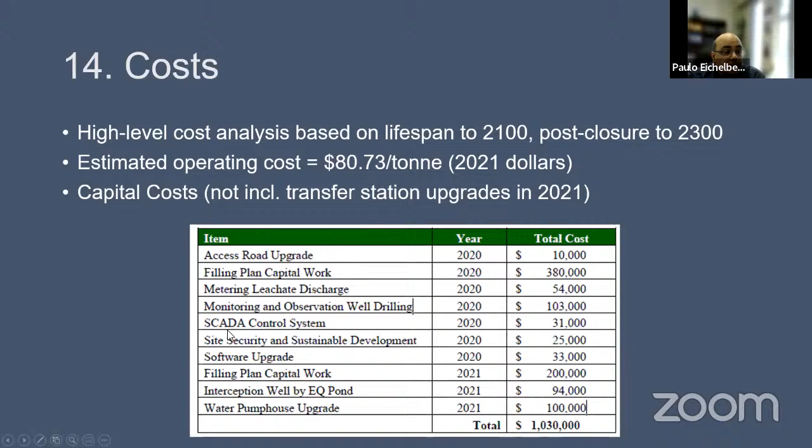Lateral expansion costs. So as we go into phase 1, phase 2 is building up on top of waste. Phase 3, phase 4 will need a liner system in place. So part of that capital cost as we go through closure, post-closure, is part of this work here as well. High level estimate of approximately $6 million, and unit cost is based on per square meter. Again, this planning phase is quite a ways off in the future.

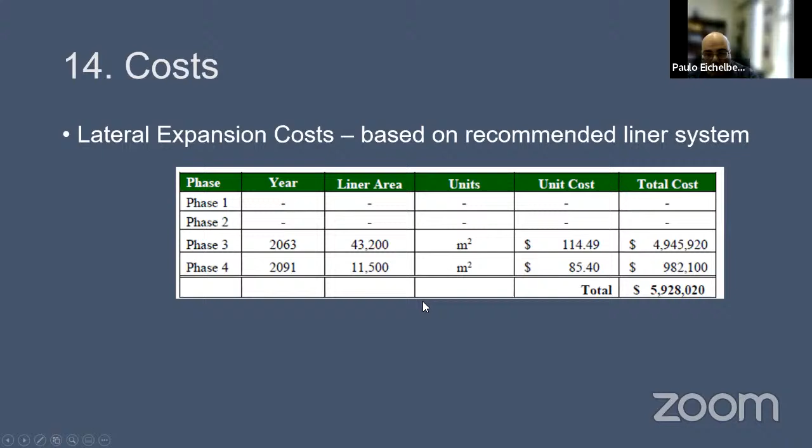So using all of those, the post-closure of the earlier slide, we look at a break-even tipping fee, which is what Sperling Hansen calculates. The idea behind getting all those high estimates together is: are we charging enough on user tipping fees or not at this point? Break-even tipping fee, if you didn't put anything else in right now, is $80.16 per ton based on this modeling. For comparison, our minimum fee is $130 per ton.

And that's it. I blew through a lot. If there are any questions, by all means, let me know.

So we've got a few questions coming up there. I'll start with Director Beckett.

Thank you, Paulo, for the presentation. One question, one comment, and I'll start with a comment. Last week I was in Ontario and I drove by what was an active landfill site just out of Windsor. It's closed off now, and there are a number of wind turbines on top of it. I don't know where the power is going to, but it was a post-closure revenue initiative, I'm sure.